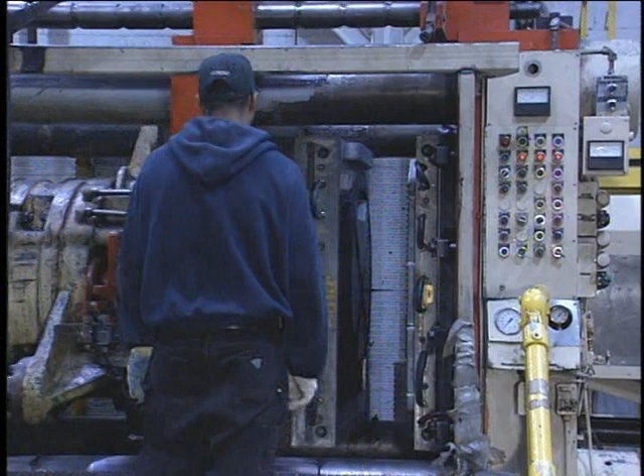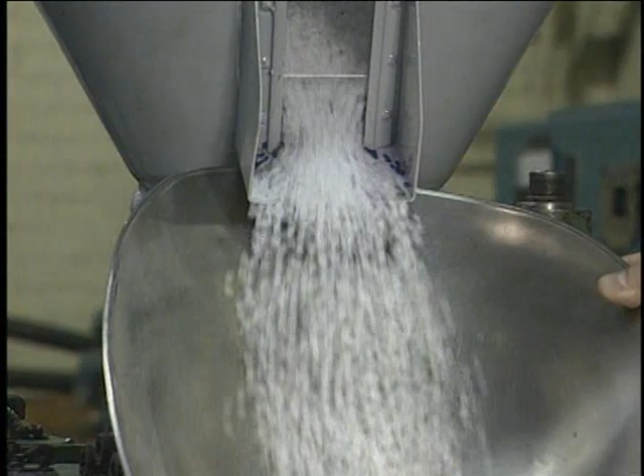To better understand the injection molding process requires understanding some properties inherent in plastic itself. The simplest definition of a plastic is any natural or synthetic polymer that has a high molecular weight. There are two types of plastics: thermoplastics and thermosets.

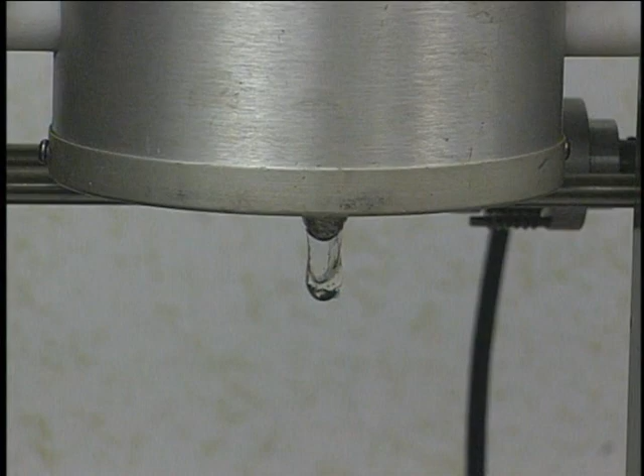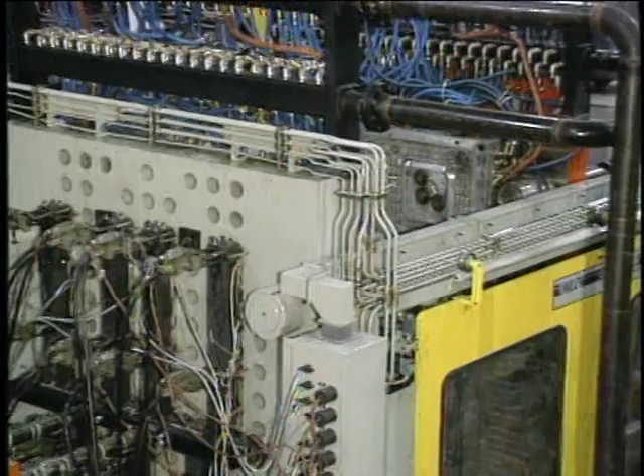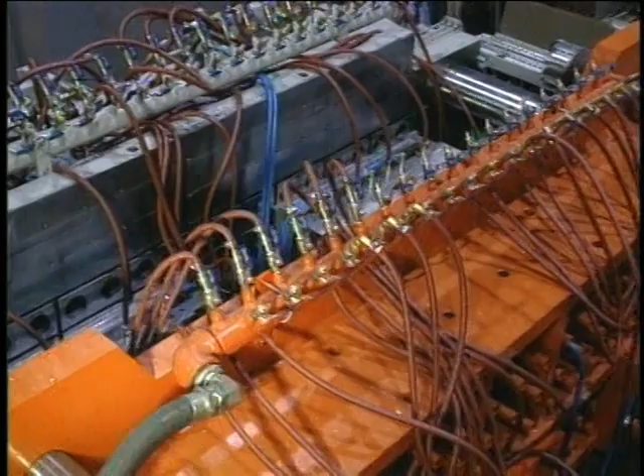Thermoplastics undergo a reversible change from solid to liquid when heated, and can be cooled and reground for reuse over and over again. Thermosets undergo a chemical reaction between two reagents when heated, and achieve their strength through the interlocking chemical bonds. Once molded, thermosets cannot be resoftened. While thermosets are injection moldable, most materials used in injection molding machines are thermoplastics.

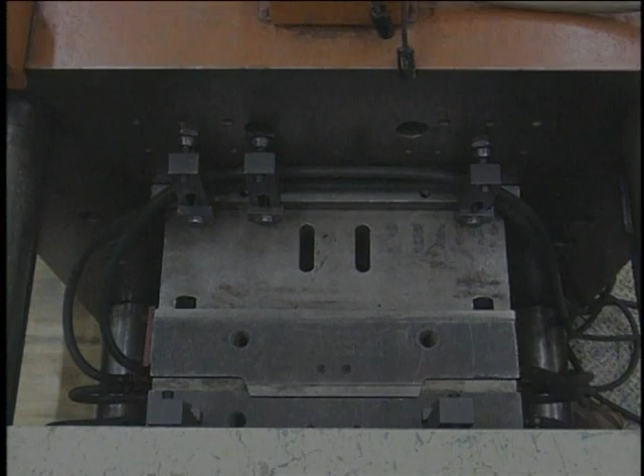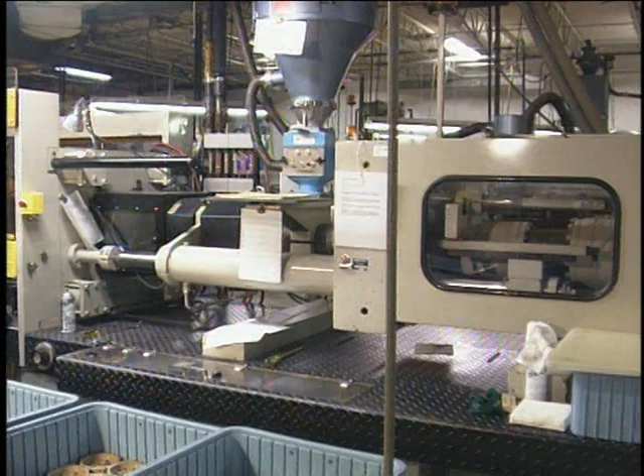Injection molding plastics is extremely complicated because of the infinitely changing pressure, temperature, and velocity inside the mold. These molding conditions directly affect the properties of each molded part. A change in any of the conditions will alter the parts produced. There are four primary elements that influence the plastic injection molding process: the molder, the material, the injection machine, and the mold.

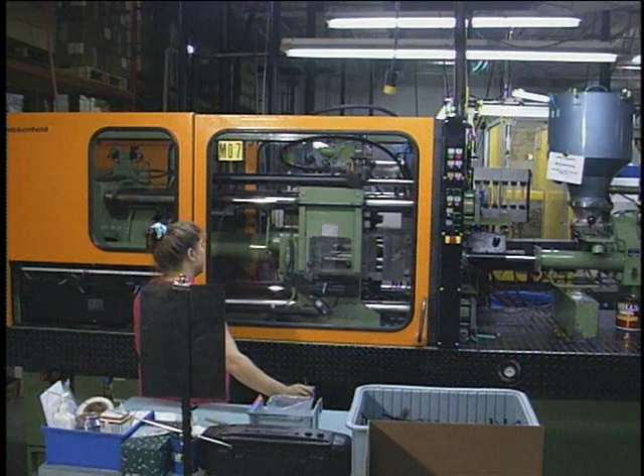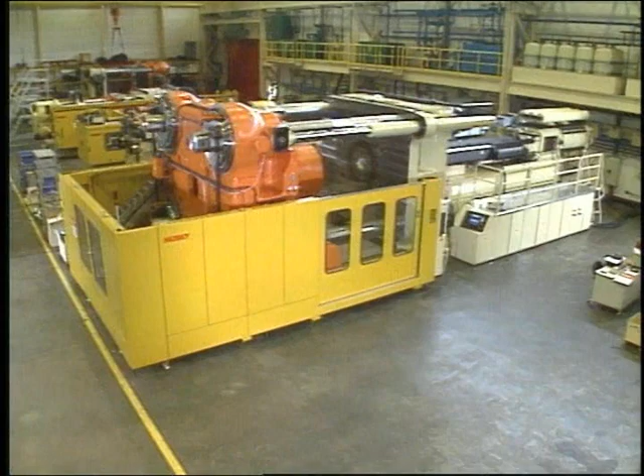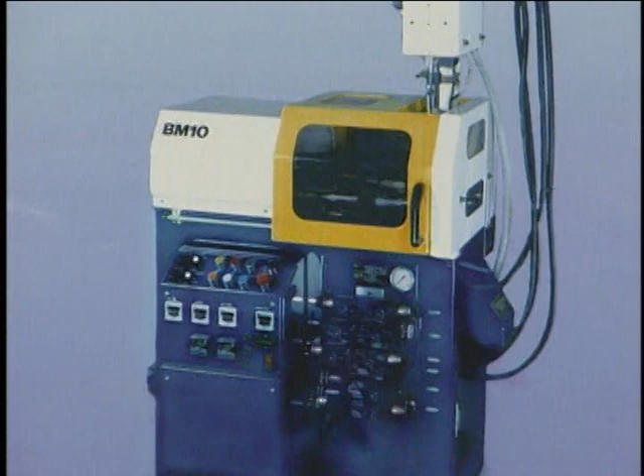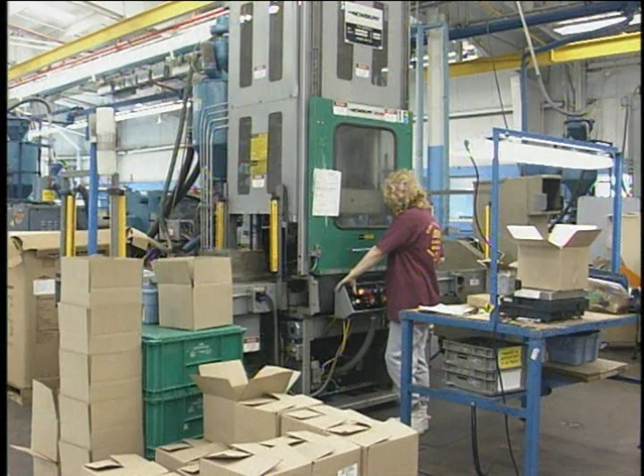There are a variety of injection molding machines in use today. The vast majority of these machines are hydraulically actuated and have 3 platens. But newer styles, such as 2-platen injection molding machines and electric injection molding machines, are now gaining market acceptance. Injection molding machines range in size and complexity from desk-size units up to machines the size of a small house. Most injection molding machines are horizontally oriented, but vertically oriented molding machines are available. These vertical machines are primarily used for insert molding.

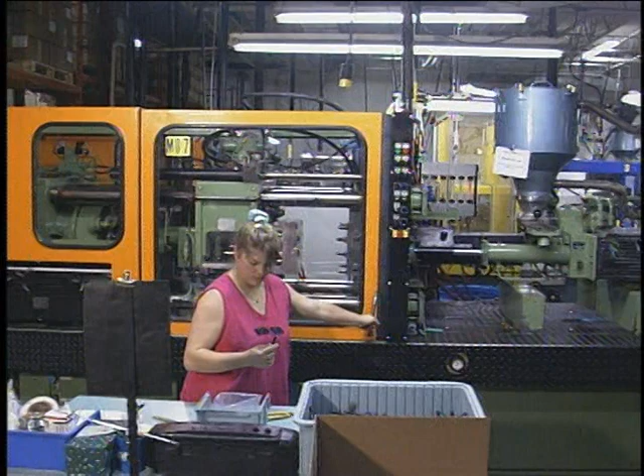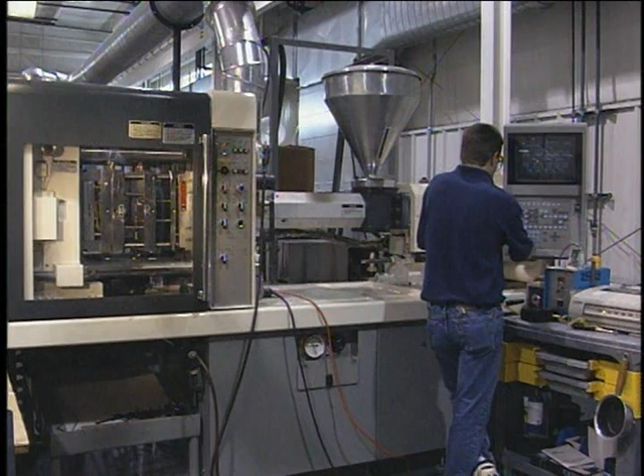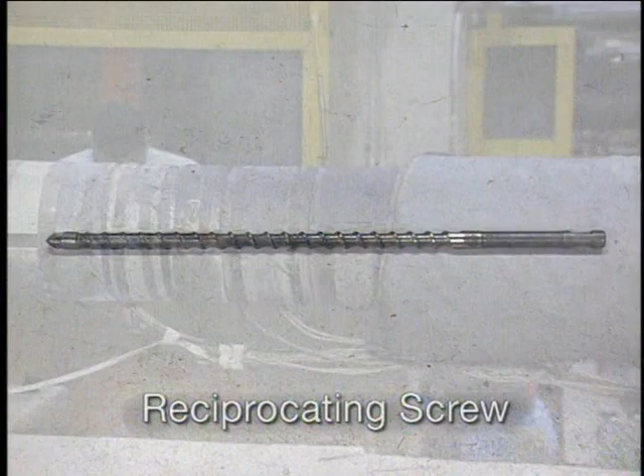All injection molding machines are a combination of 2 systems: an injection system and a clamping system. The injection system heats the thermoplastic material to its appropriate viscosity or flowability and then forcefully injects it into the mold. There are 2 types of injection mechanisms: the reciprocating screw, which is the most common, and the 2-stage screw. The main parts of the reciprocating screw injection system are the hopper, a reciprocating screw inside an externally heated injection barrel, a hydraulic motor, and an injection cylinder.

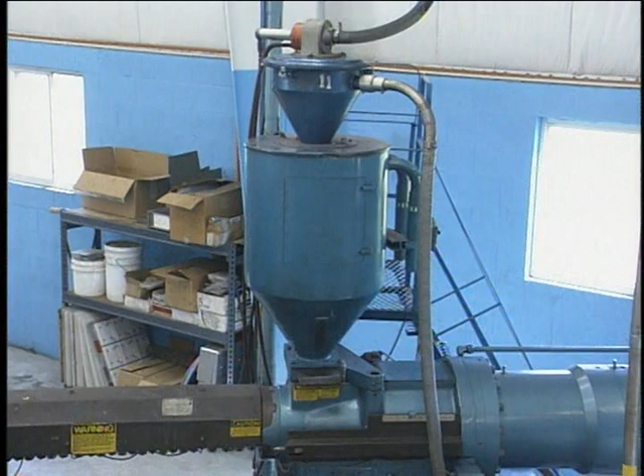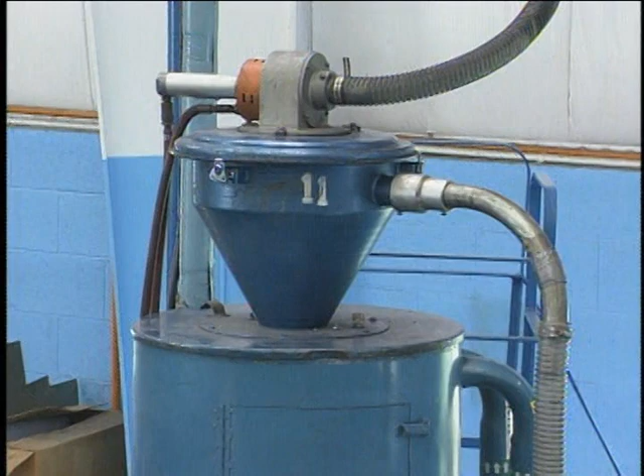Resin material is fed to the injection barrel from the hopper. These hoppers may be filled manually or vacuum-fed automatically, and often have dryers attached to the top to remove the moisture from the material. As the resin enters the injection barrel, it is driven forward by the rotation of the screw, which is powered by the hydraulic motor.

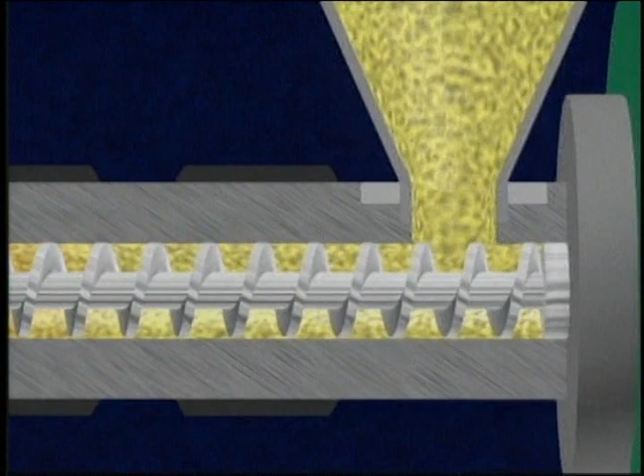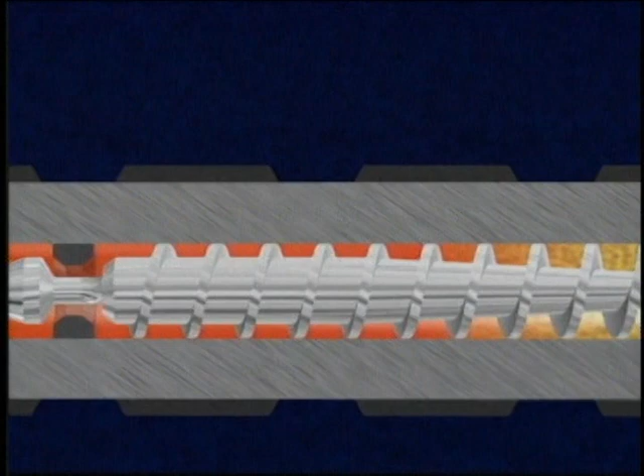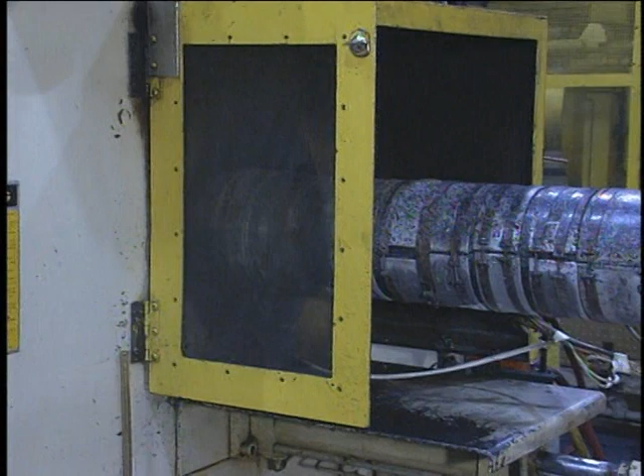The resin plasticizes or melts as the turning screw drags it towards the nozzle end. This is referred to as drag flow. Drag flow causes the polymer molecules to slide over each other, creating frictional heat, which melts the material. External heating bands provide additional heat to the injection barrel. The heating bands bring the material to its final temperature and compensate for the radiation heat loss. The temperature is controlled by 3 thermocouples in the barrel and 1 in the nozzle.

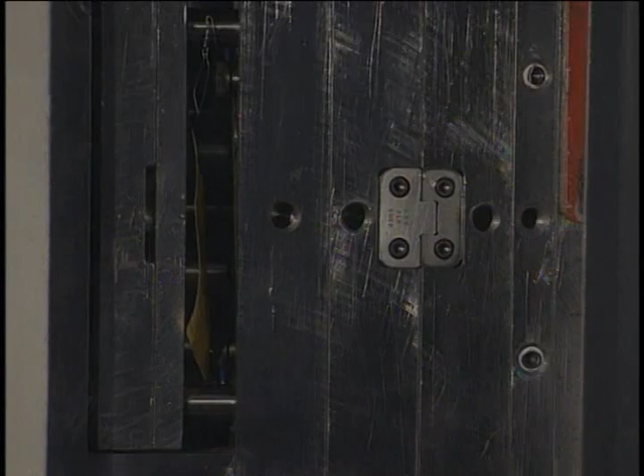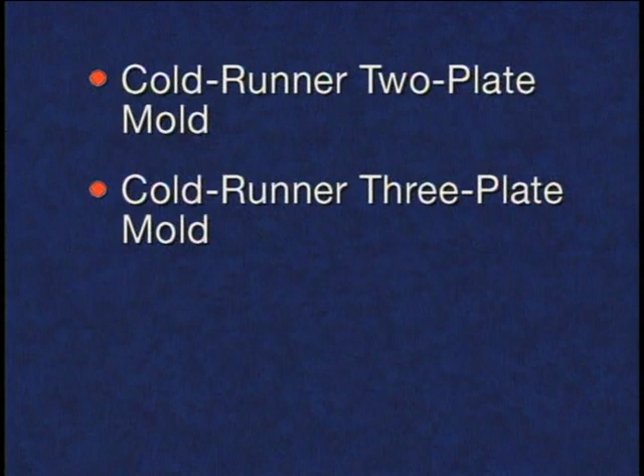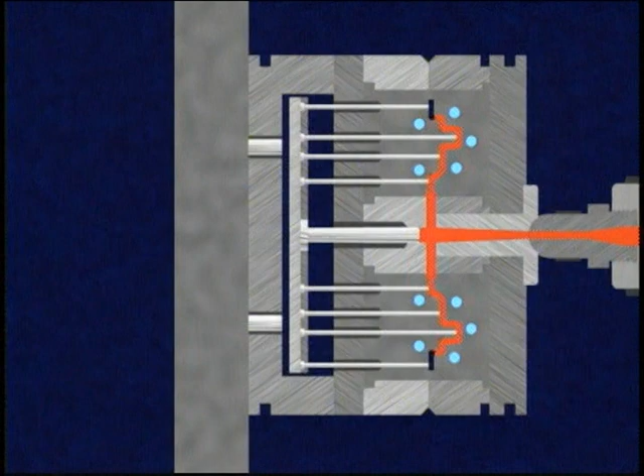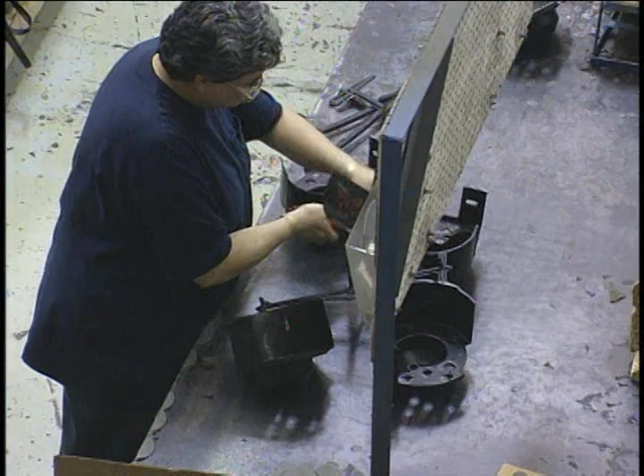Over time, many different mold designs have been developed that meet specific injection molding requirements. These mold designs include the Cold Runner 2-plate mold, the Cold Runner 3-plate mold, the Hot Runner mold, and the Insulated Runner mold. The Cold Runner 2-plate mold consists of 2 plates with the mold cavity and core mounted on them. The Cold Runner system molds the sprue, runners, and gate along with the parts. After ejection, the parts are separated and the rest reground.